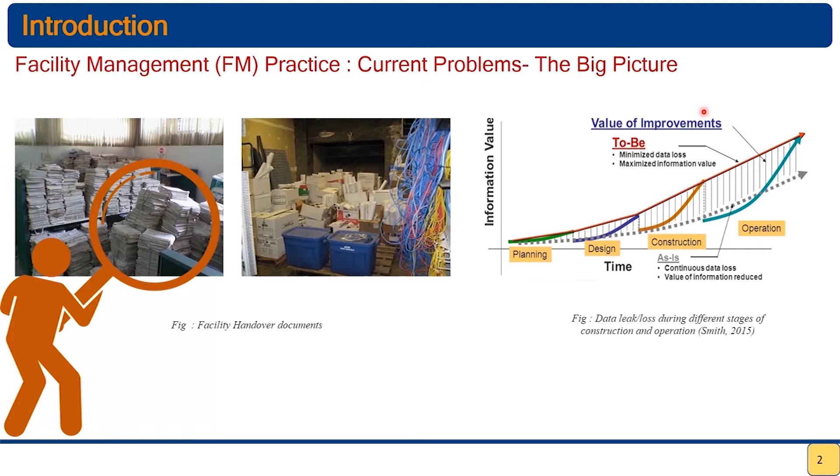At the same time, construction handover has always been a struggle. Most of the information generated during the design and construction stages are lost, as the design and construction team are not very much aware of the requirements of FM stage. As we can see in the graph on the right hand side, there is a continuous data leakage as we move from planning to construction to operation stages. Among these loss of data, many can be useful for operation and maintenance purposes.

As building information modeling, or BIM, started to gain acceptance in our AEC industry, the need to store data structurally became of paramount importance. BIM models help in storing these data, which are then utilized in various design and construction activities, such as clash coordination, energy calculation, design options, costing, scheduling, and so on. There has been a growing interest in harnessing the data stored inside the BIM model for facility management purpose to develop a proper use case for BIM in an entire life cycle of a construction project.

As shown in the picture, the need for BIM uses in FM arises because operation and maintenance, or O&M, cost about 58% of the total cost of a building in a life cycle. Moreover, there is a huge data loss during handover, and high amount of time and cost is spent to generate or recreate the data inside the existing maintenance system. So, BIM can help in integrating various systems, help in reducing cost in terms of man-hours spent on recreating the data in the existing maintenance systems, and it will definitely improve performance.

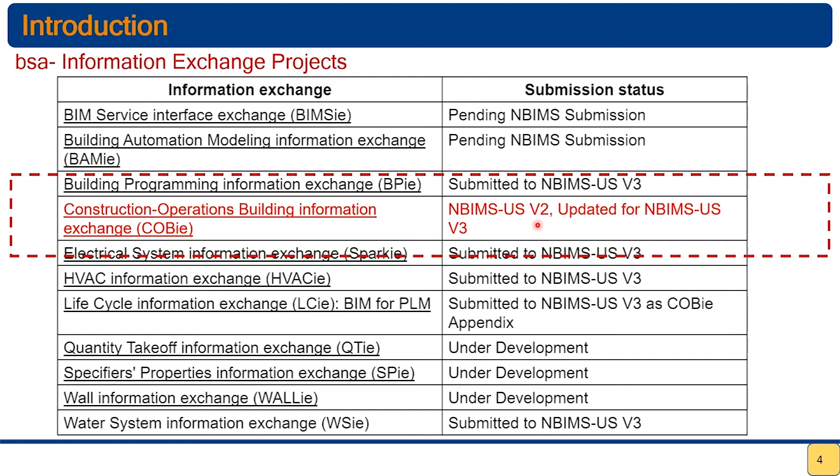So what is COBie? COBie is simply a standard method to transfer or exchange information from design and construction stage to facility management stage. Technically, COBie is a performance-based specification for facility asset information delivery. Two types of assets are included in COBie: equipment and spaces. COBie helps the project team organize electronic submittals approved during design and construction stages and deliver a consolidated electronic operation and maintenance data with little or no additional effort.

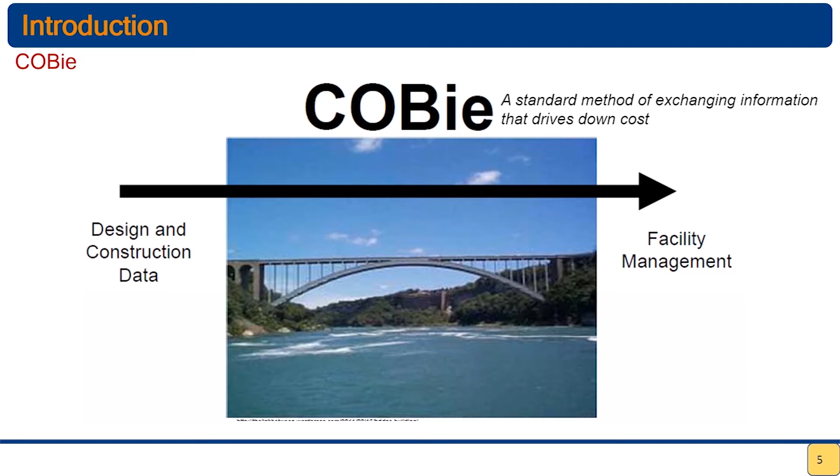So a COBie datasheet is built over a period of time, whereby the information inside the COBie sheet is filled throughout design and construction stages. This process of continuous capturing and checking of data is called COBie data drops.

So as we progress from design to construction to operation stage, the need for graphic inputs actually decreases. So we can see that the design stage has more of a graphical input and less of data inside. And as we are moving forward and we are reaching operation stage, we don't need that much of graphics, but we need more of product data. That means that as we approach completion, we want to know more about the warranty, operation manuals, safety instructions, than whether there are detailed nuts drawn in the BIM model.

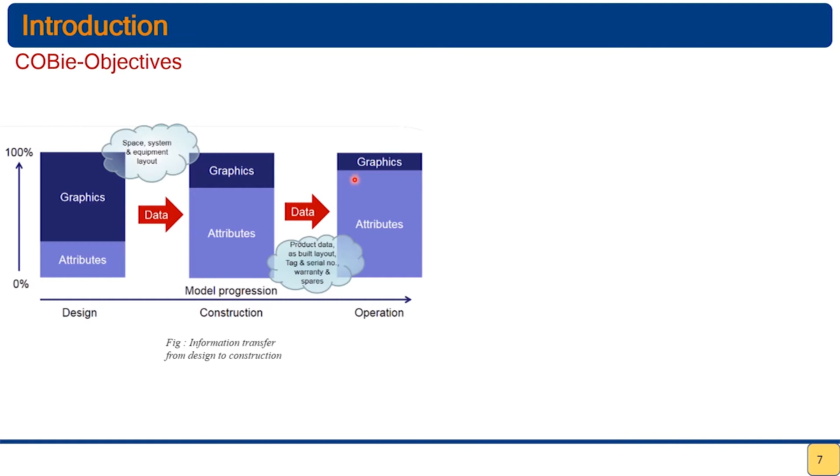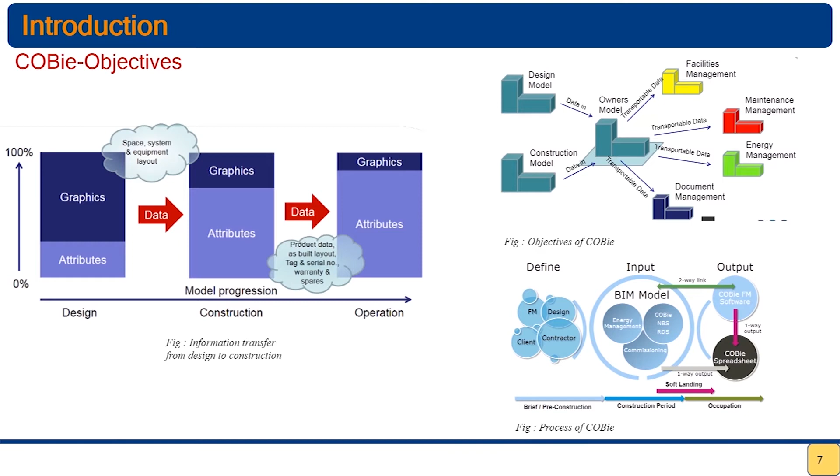Therefore, the objective of COBie is to merge all the information coming from design model, construction model, and other models and export only data necessary for operation and maintenance activities. Moreover, the process of COBie extraction is to define what all data is needed for operation and maintenance purpose, input those data during design and construction stages, and then output and hand over the COBie file during the facilities handover.

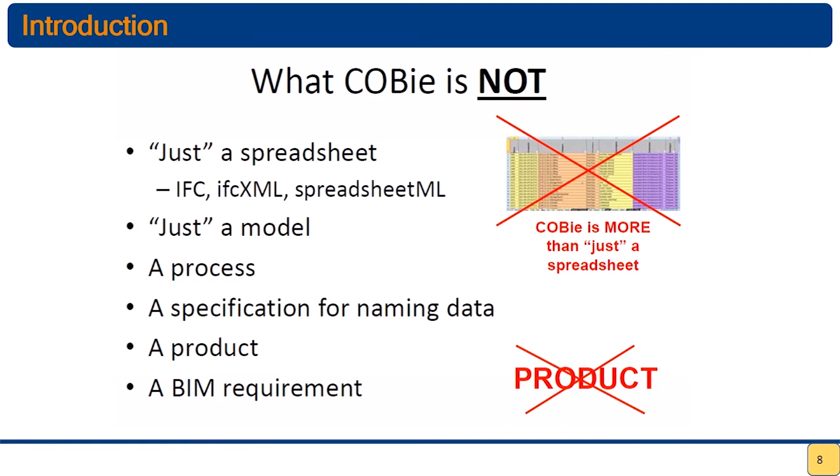Now, before we go further, we must keep in mind that COBie is not just a spreadsheet where data need to be captured. It is a dedicated process to capture systematically the required standard operation and maintenance data throughout design and construction process. Moreover, it's a data format and hence not a product and not a BIM requirement.

What we can see here is a typical COBie workbook. The columns in the COBie sheets are colored. These colors have significance. The yellow color cells should have unique value. That means there should not be any duplicates. Similarly, salmon colored cells show that these data link to other workbooks. The purple color cells data originates from software systems.

So for example, if you are using Revit, there will be different cell values in this. If you are using ArchiCAD, there will be a different cell value in this, and so on. The green color data are user defined, and the blue color data gives flexibility to add additional columns to the COBie workbook as per owner's requirement.

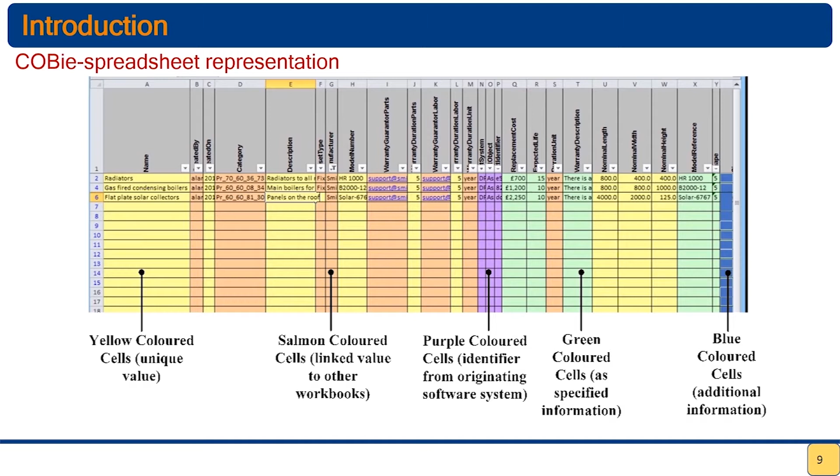This slide shows the workbooks for which the COBie data sheet collects the data. So we can see down here the 20 workbooks as I mentioned previously in my presentation. We must keep in mind that it is not allowed to change the structure of this COBie sheet. That means we cannot change the cells here, we cannot change the columns here, and we cannot change the name of these workbooks here.

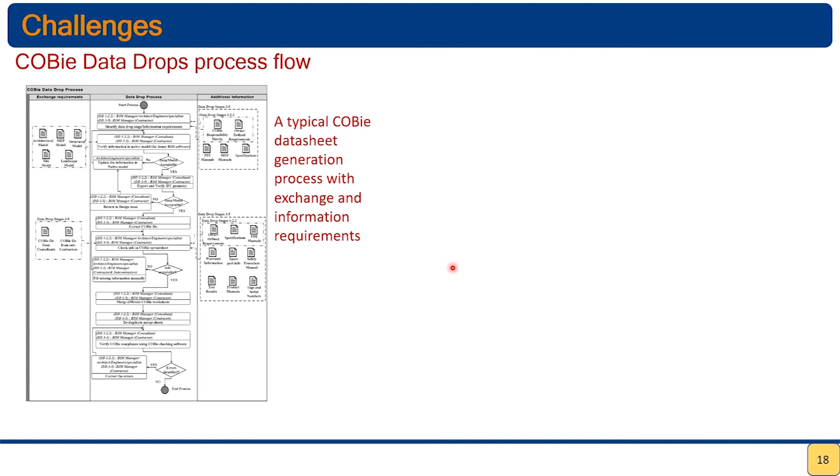In this diagram, we can see that a typical COBie data sheet generation process needs to pass through so many steps. Now imagine if these steps need to be done at all the COBie data drop stages. This entire process needs multiple levels of verification and data inputs. So we can see this entire process at each data drop stage has manual inputs of data which need to be repeated and again validated at each and every COBie data drop stage.

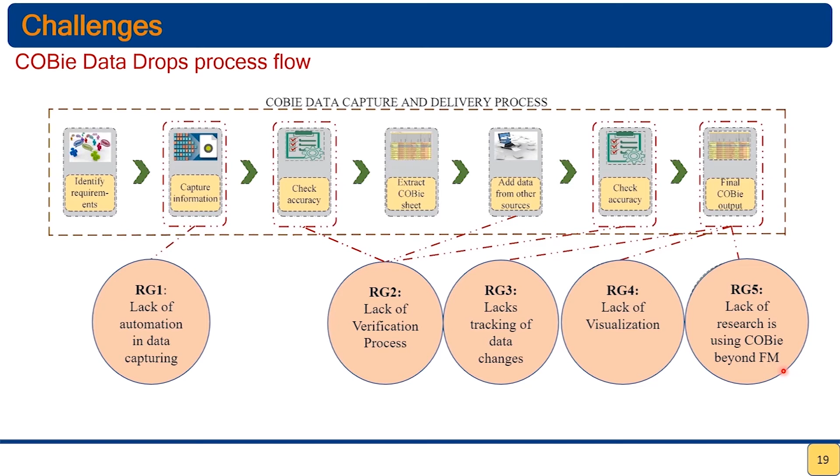So a thorough study of the COBie delivery process highlighted various research gaps. The first research gap is related to data capture for COBie, which is highly reliant on manual inputs. The second research gap is lack of a verification process to check data consistently. The third gap is related to lack of means to analyze how data has changed in the COBie sheet from the previous COBie submission. The fourth gap is the lack of research in application of visualization techniques on COBie datasheet representation. And the fifth gap identifies lack of research in using COBie datasheets beyond its intended purpose of FM use.

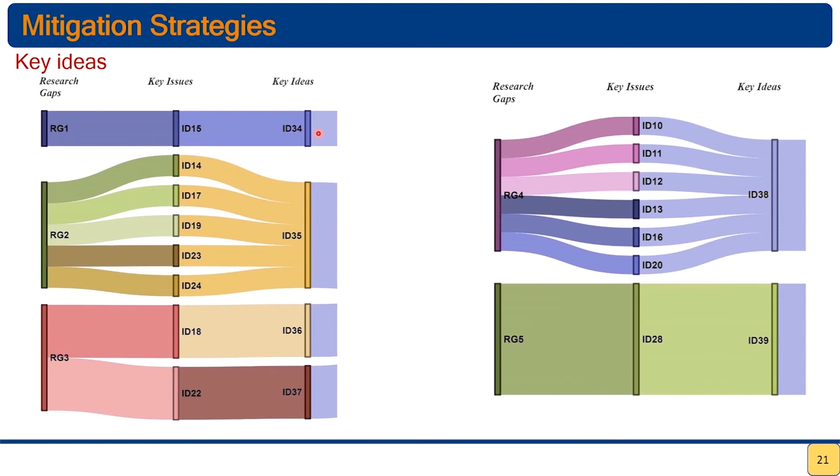So to address these research gaps, we proposed in our research various mitigation strategies. These strategies were later developed into prototype tools which can help in solving the identified challenges. So this Sankey diagram basically shows how the research gaps, various issues, and mitigation strategies, which are mentioned here as key ideas, are mapped.

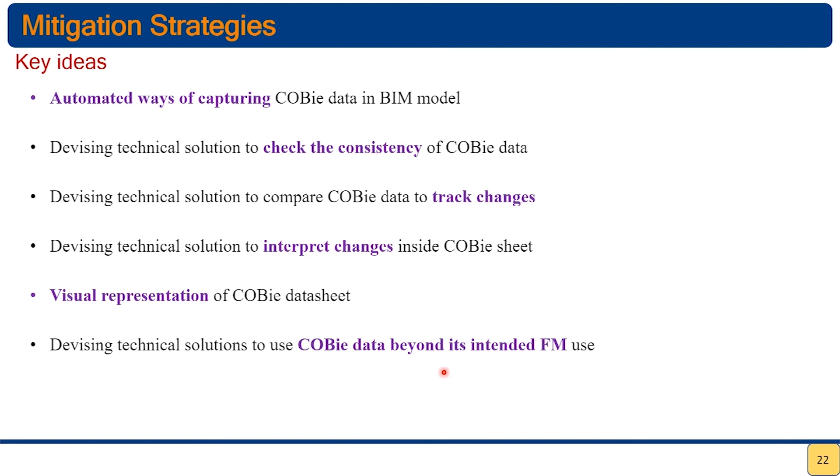So some of the key ideas identified during recent research are automated ways of capturing data in the BIM model, devising technical solutions to check the consistency of COBie data, devising technical solutions to compare COBie data to track changes, devising technical solutions to interpret changes inside the COBie sheet, visual representation of the COBie data sheet, and devising technical solutions to use COBie data beyond its intended FM data handover use. The resultant of these key ideas and mitigation strategies manifested in a proposed COBie Dataset Management System, or CDMS.

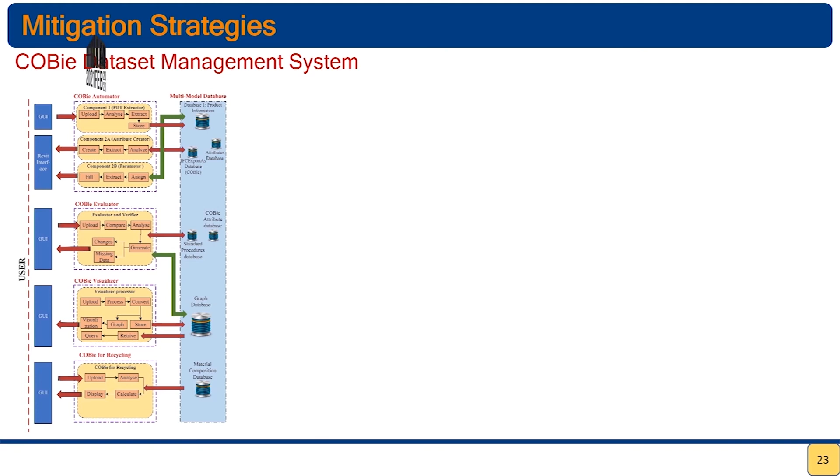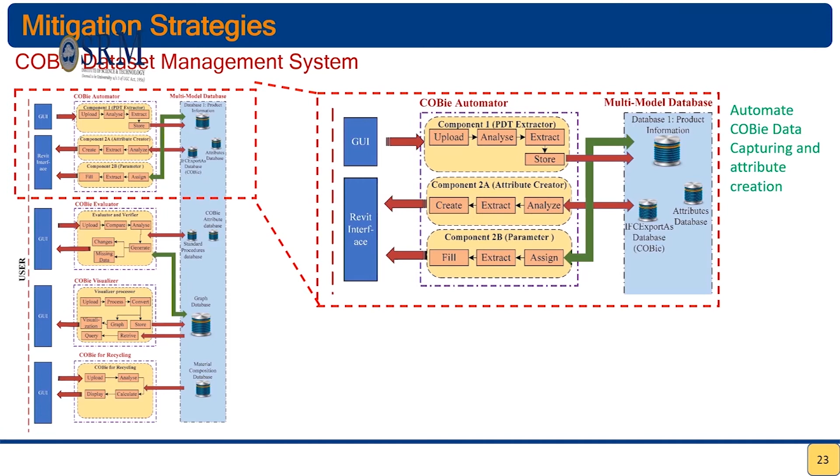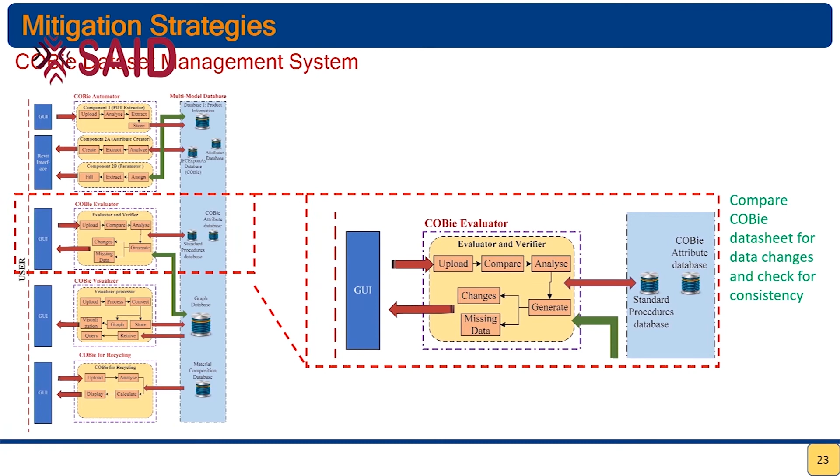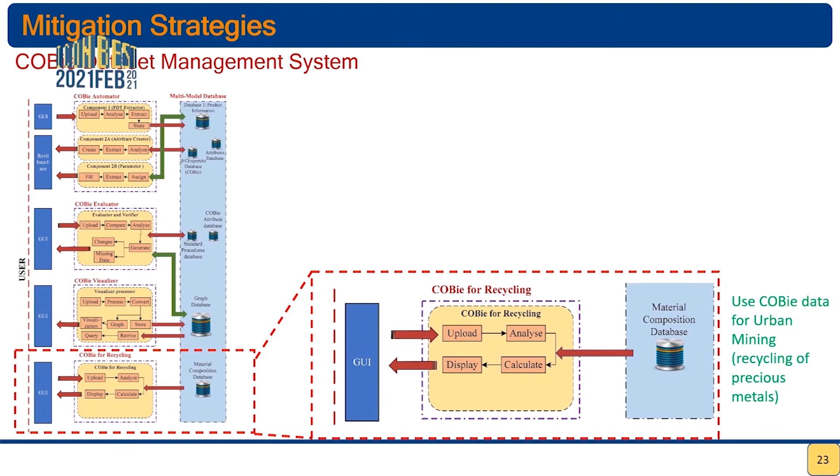The proposed prototype of CDMS consists of 4 modules. The first module is called COBie Automator, which uses product data templates as an input to automate COBie data capturing. The second module is called COBie Evaluator, which evaluates COBie data to find discrepancies; it does verification, comparing of two COBie data sheets, etc. The third module is called COBie Visualizer, which visualizes the dependency connections inside COBie data sheets in a graph model. And the fourth module is called COBie for Recycling, which uses COBie data to calculate the urban mining potential of a building.

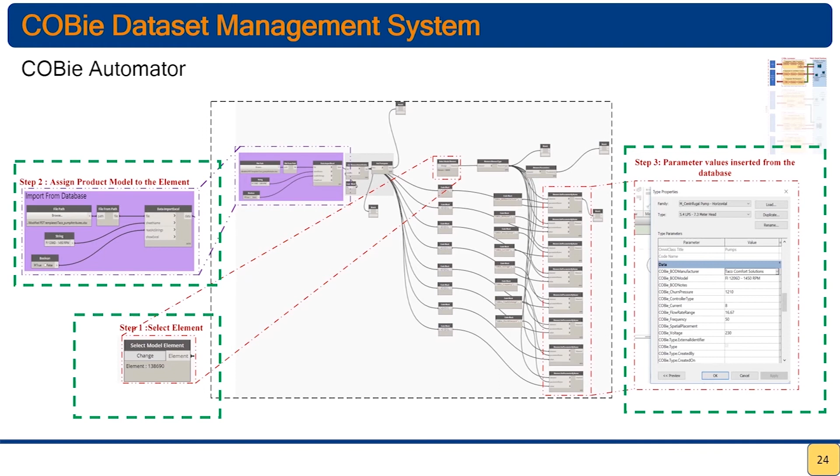In COBie Automator module, we created reusable data storage functionality in which a manufacturer data about a product need to be captured once. This functionality helps in creating a reusable data bank across various projects. In this, we just select an element, assign a product from the database, and all COBie data related parameters are created and respective values are captured automatically for COBie.

Now the second module is called COBie Evaluator, which has 2 sub-modules. The first sub-module is called COBie Verifier, which verifies the consistency of COBie dataset. It verifies missing data, duplication, incomplete data, incorrect format data, and also checks data dependency and links. The second sub-module is called COBie Compare.

This sub-module compares 2 COBie datasheets to identify what data has changed and what is the meaning of this data change. Using this, we can identify what are the changes in design at equipment level. For example, we can identify which equipment has been removed, whose specification has changed, and which room is deleted, and so on. The third module is called COBie Visualizer.

The current problem with COBie dataset is that even though the data inside COBie files is linked using the colored cell, that linkage connection is not visible in spreadsheet format. It takes a lot of time to find the relevant connected data inside the COBie datasheet. Therefore, a graph model-based visualization was used to represent the connected data in COBie datasheet.

Using this, any data can be searched and researched in a shorter time. For example, we can just search how many equipments belong to a plumbing system or how many spaces belong to zone A using SQL-based search.

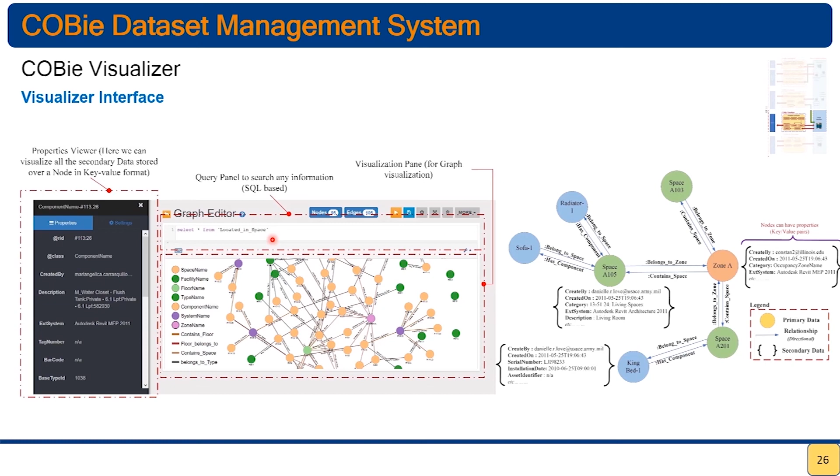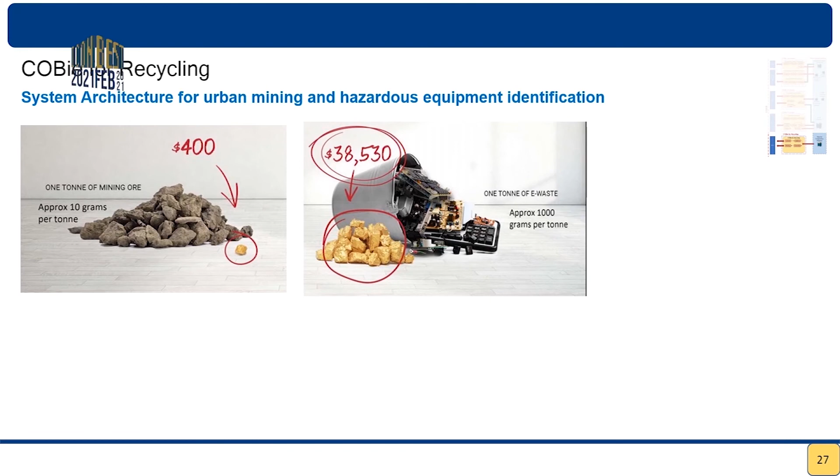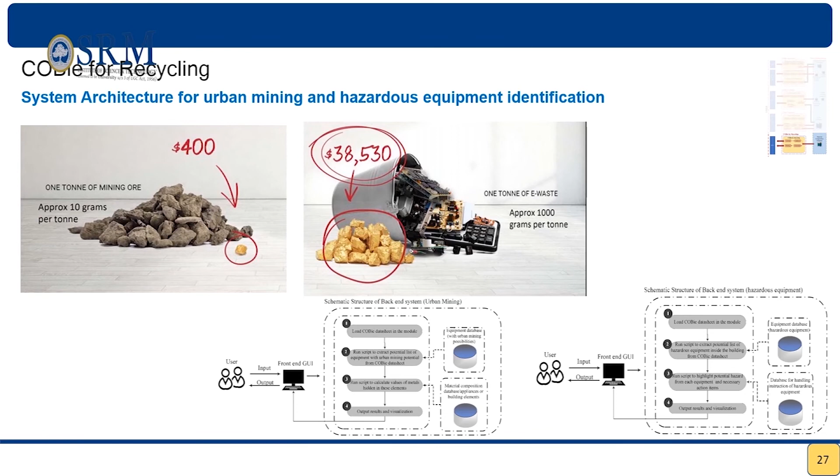Therefore, the last module is called COBie for Recycling, whereby a COBie dataset is used to calculate the urban mining potential of a building. In this module, a database has been created whereby urban mining potential of various equipment are stored. By inputting the COBie datasheet, we can automatically calculate approximate value of hidden metal inside building.

With this, I want to summarize my presentation. This presentation was about understanding the benefits, challenges, and mitigation strategies to increase COBie usage. So, the key benefits of using COBie are: it saves time and cost, reduces ambiguity, and enhances sharing of FM information. Similarly, there are several challenges associated with usability of COBie.

Some are lack of visualization, lack of automated capturing of data, lack of verification process, etc. To mitigate these and increase usage, we need to explore automated ways of capturing data inside them, automated verification process, and use of visualization techniques, and so on.